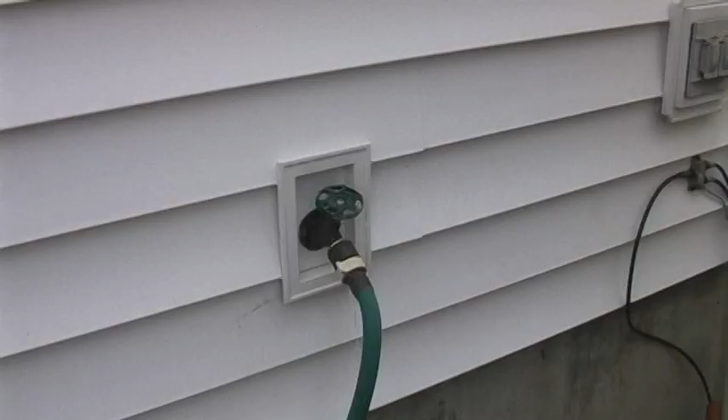The hose bib here at the side of the garage is leaking around the handle pretty excessively and isn't caulked at the siding junction, so it looks like it's spraying water into the wall cavity a little bit. Now look at it running out from behind there. So this hose bib, yeah, is actively leaking behind the siding a little bit.

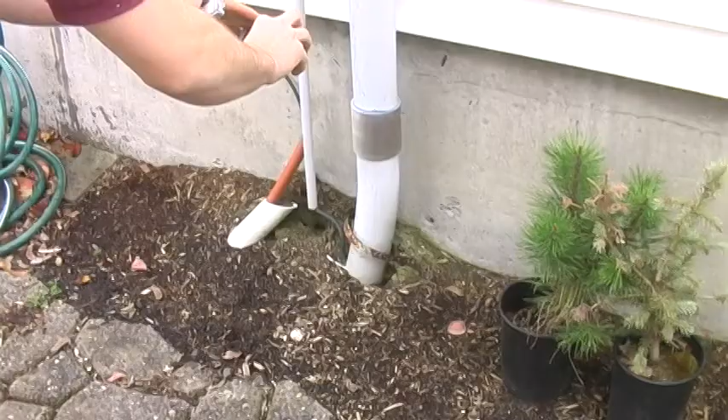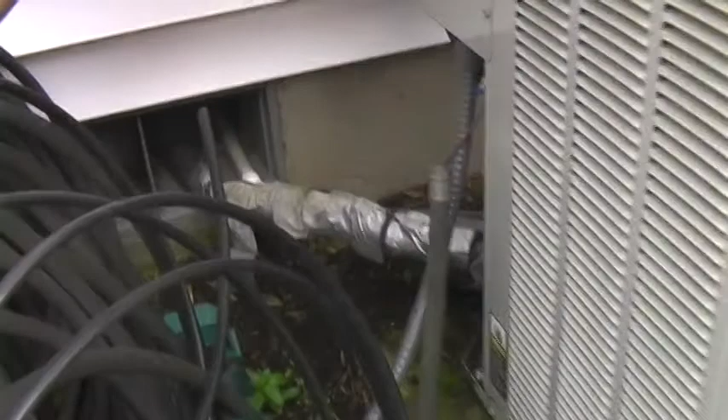If the ground settles around that conduit, it'll keep it from putting tension up here on these connections. So there's normally a clamp there and a clamp there that just physically connects that conduit to the side of the house.

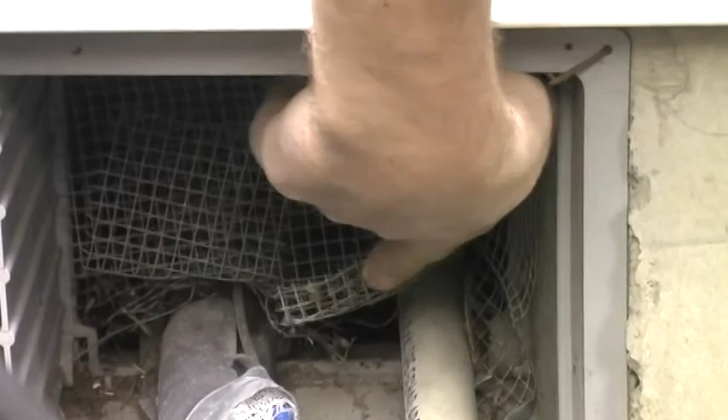Now, anytime we get bugs or rodents and things into the house, it's normally around these pipes and things. You see how those screens are kind of loosely fitting? A mouse could go under there pretty easily. It'd be good to seal around it with some construction adhesive, some more caulking, which would kind of positively glue the whole perimeter of that screen into the opening.

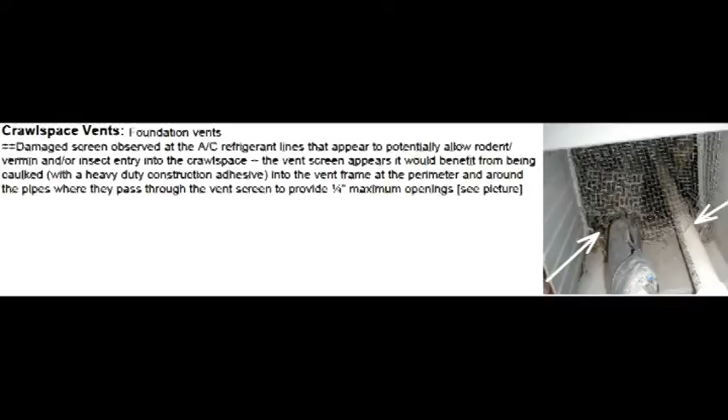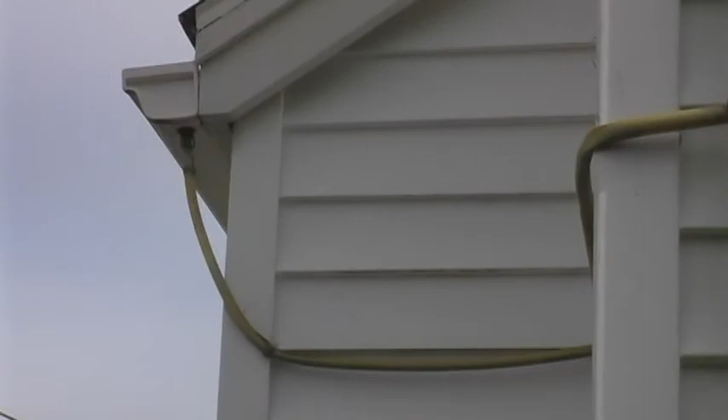But really, this is gonna just essentially overflow. It's gonna act as if there was... I think this is just as good as no downspout and gutter because of this. This is a real big restriction there.

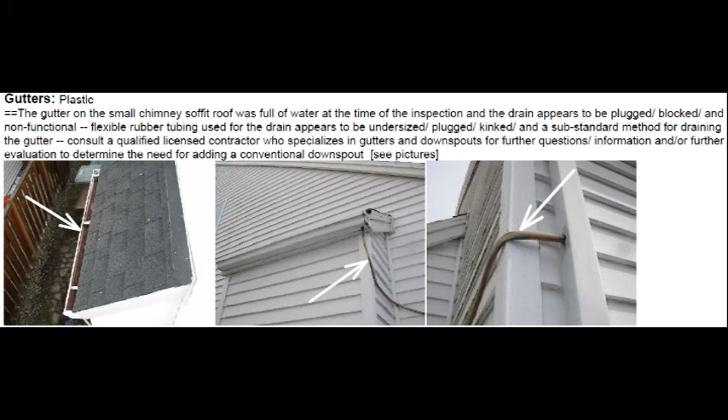One other thing too, these have these flappers that open and close onto the crawl screens, and really, you want to leave those open year round. A lot of people think you want to close them in the wintertime to keep from losing heat, but those are to allow air to travel in and out of the crawl space. So if there's any water that does accumulate down there, you want to allow it to evaporate and keep the humidity levels down.

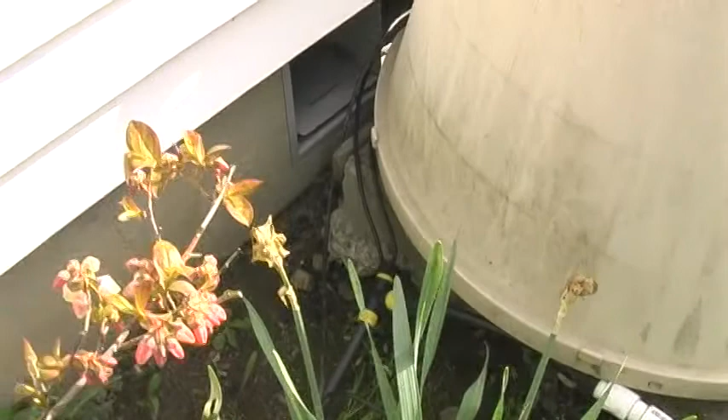See, anytime they hook the landscaping sprinkler system in to the actual, we call it hard piping it, when it's actually hooked in permanently to the water system, there's supposed to be a reverse anti-siphon device that will prevent reverse flowing of water.

Well, let's say this is turned on and one of these drippers is sitting in a puddle of water. Sometimes water pressures fluctuate, and let's say there's a fire down the street and the fire department comes and hooks their hose up to it. It can actually back siphon water, so it would basically be sucking dirty water into your drinking system.

And so they require it on landscape systems because of fertilizers and things. There's a few instances in the past where somebody's died because they contaminated their drinking water supply. So usually it's just a small part that you can add. It's an air gap.

Here at the rear of the house there is a hole next to the kitchen window. Looks like where it got shot with some kind of pellet gun or something.

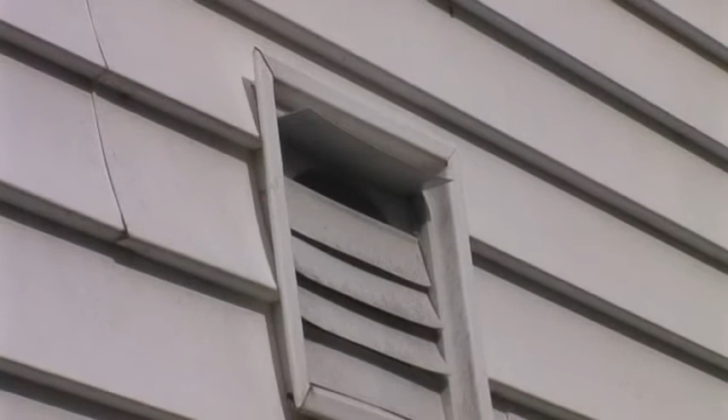See how that's getting stuck open? These are just flimsy little plastic baffles, and you can see how they're kind of curled. The UV rays cause those to do that, and then they don't close all the way. So you want them to close when it's not in use and open when you turn the vent on. What you don't want to happen is if they get stuck open, potentially wind-driven rain can get into the wall there, or you can get bugs in, or possibly, I've seen birds build nests in these.

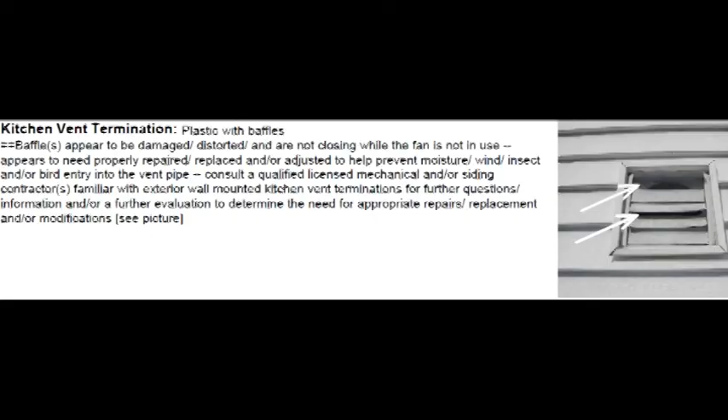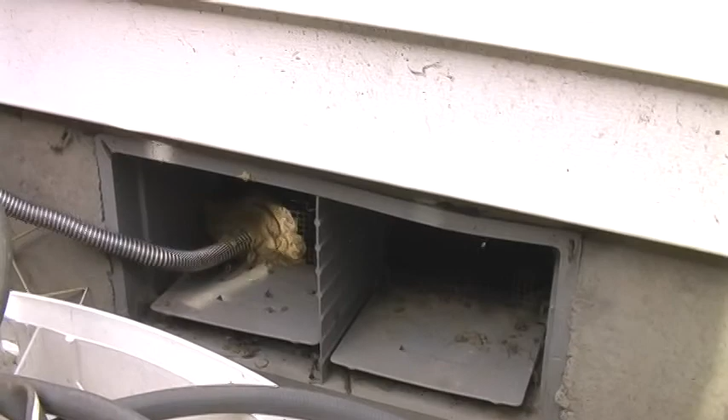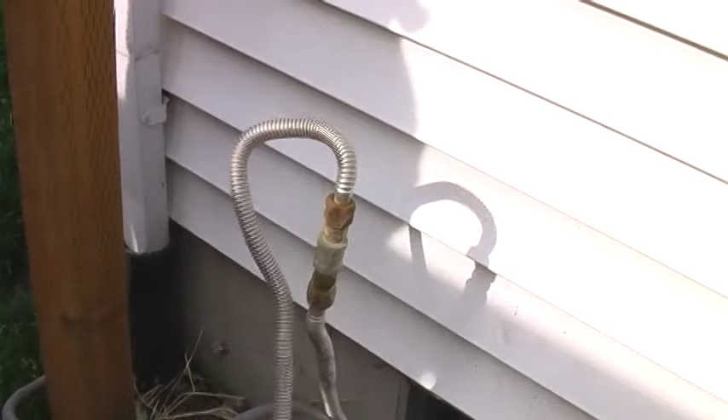Is that a gas line hookup? This is so you can have a gas barbecue. This is done really poorly too. You're not supposed to use multiple flex pipes like this. You're usually allowed to have one of those per fixture, one per the range. They've got two hooked together, and this isn't designed to pass through a finished surface.

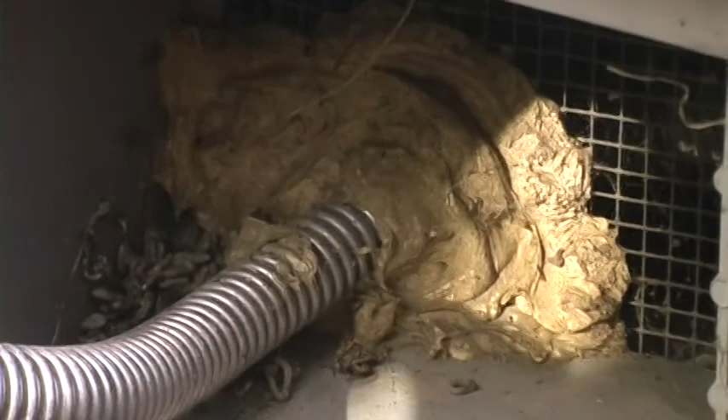It should have been hard piped out to this point, and then they could use a flex connector. So this will be on my repair list too, because it looks really amateurish. Anytime you're dealing with gas lines where you can have a gas leak, it's usually something I make a big deal out of.

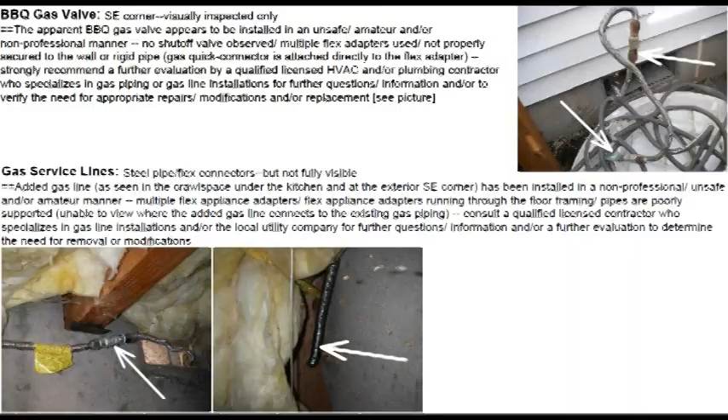Your dryer vent. So look at all that lint. I see that on almost every house more than 2 years old.

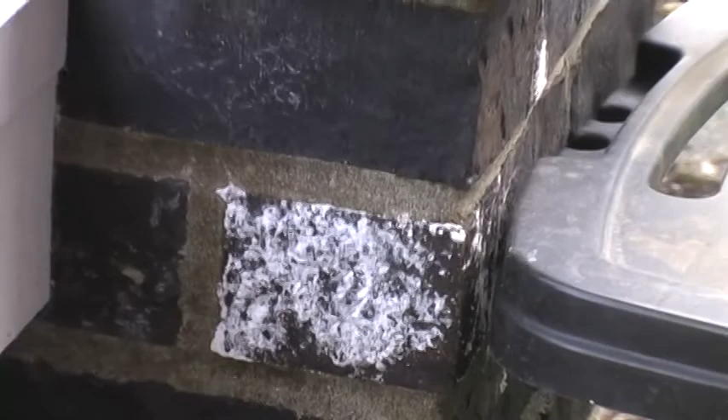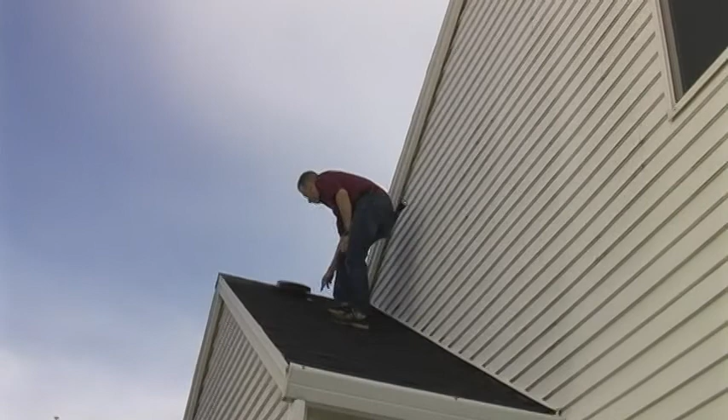See this white powdery stuff? It's calcium deposit. It's called efflorescence. So anytime you're having brick get saturated and then it evaporates out, it brings the minerals with it. So you can sometimes just put some water sealer on there, some masonry sealer. And on these caps, there's some nails that need to be caulked, so the water won't possibly seep in around those.

Boy, these are dirty. Ooh, I might stick my arm in there. Yeah, shower stalls are probably one of the most common plumbing leaks we find. The shower drain, because the drain is right in the middle of the pan, and that's where you're stepping. So you know you're dancing around taking a shower, stepping on that, it's moving up and down all the time. It's real common to get leaks.

So I'll confirm that when I go upstairs. It looks like to me at least it's been patched. That means they probably removed the ceiling and fixed it. But you need to keep an eye on that and make sure that if you ever see a water stain that you call a plumber in right away to fix that before it becomes an issue.

This is actually rusting out here. See, this is all corroded there. Yeah. This is what we would call a contractor grade disposer. So they don't normally last much longer than even 5 years sometimes.

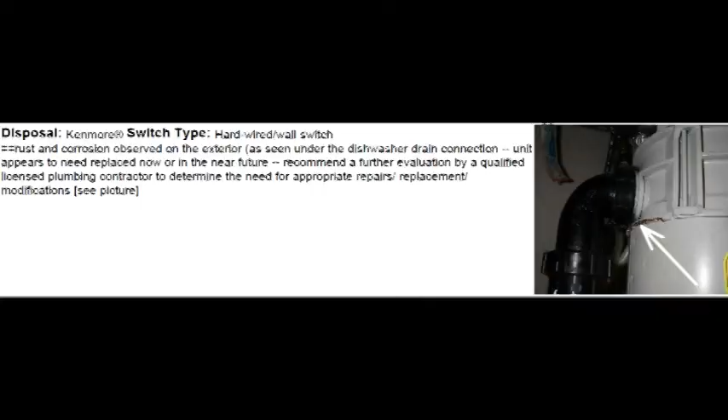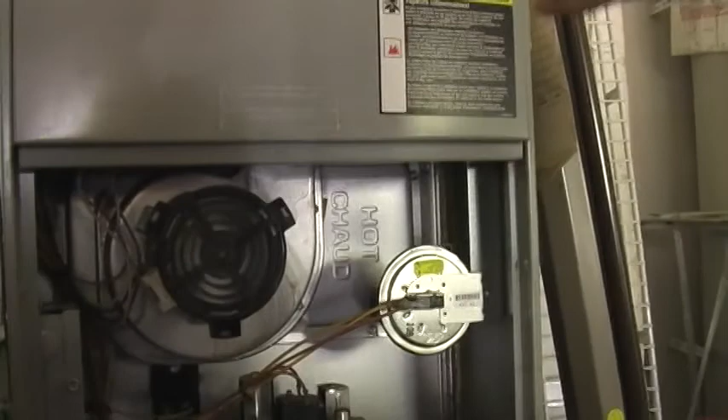So here's, you see all these water stains here? Been leaking right there. And the reason for that is the burned natural gas is really moist and has a lot of condensation. So that'll blow and then the condensation will leak back and drip there. Real normal to see that. However, that just usually indicates that this needs to be sealed.

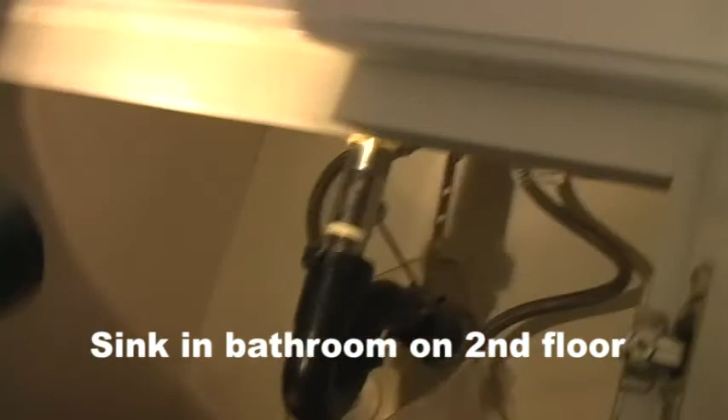This gap here. See, I don't know if you can tell, there's a little red caulking there. That's usually fire caulk and maybe just needs to be resealed. Oh look, it's dripping. You see that? It's gonna drip here in a second. Yeah, you know, I'll tell you what, can you see the water drop there on your video? Right there.

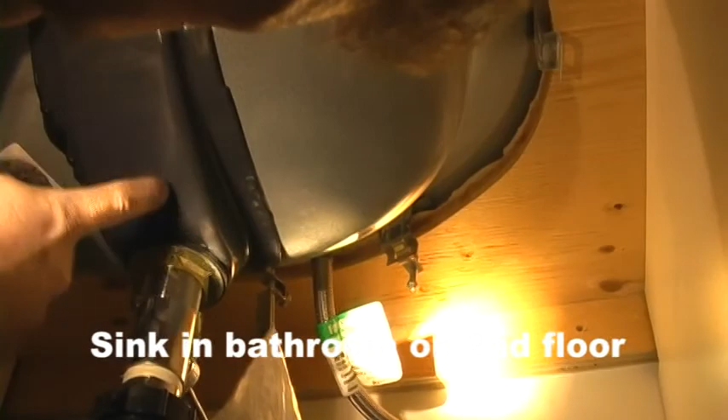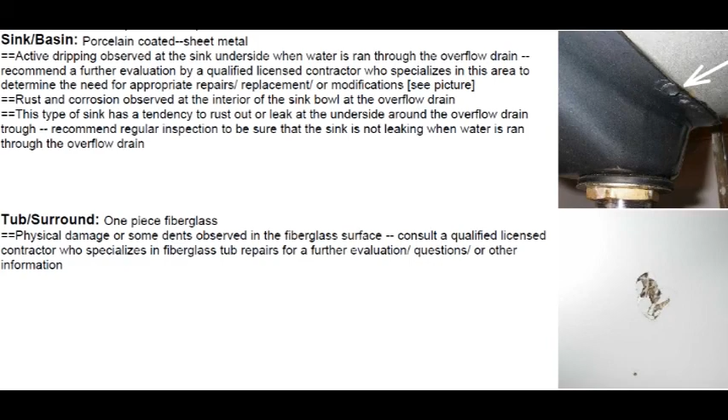This is one piece and this is a second piece, and they glue that, seal it, and a lot of times they don't get that glue. This has gotten soft from water. But you can make a note, there's a heat lamp and there's some past water damage or staining around the heat lamp on the ceiling.

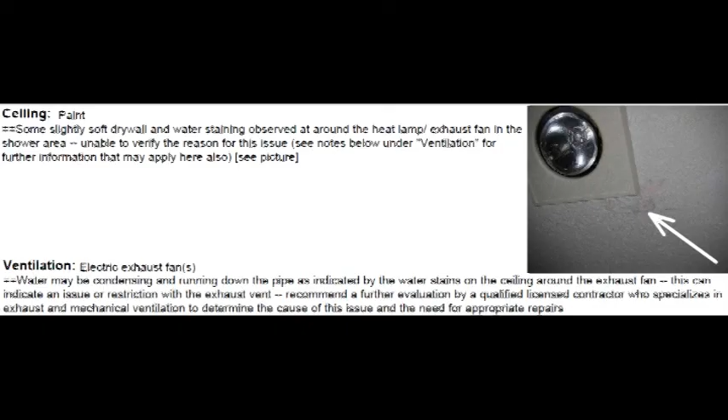There's a one-piece fiberglass shower, and just put the notes about the regular maintenance of the tub drain, and there's evidence of past repair work done as seen in the kitchen right below this.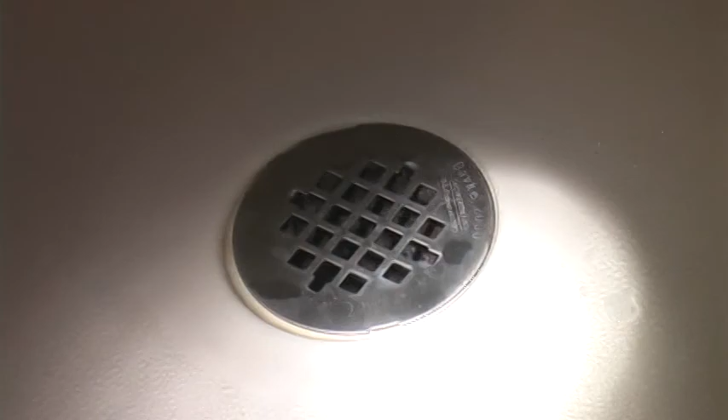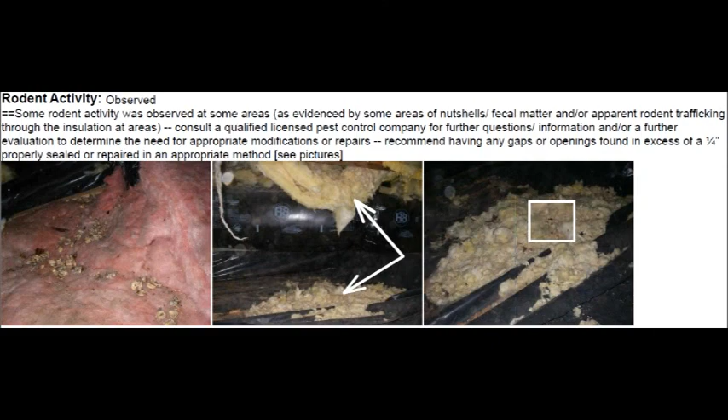Probably the bigger concern I have down there, which to me really isn't earth-shattering, but there's been a lot of rodents down there. Some maybe even bigger than rodents, like squirrels or something. I think probably because they've been coming in and out of that screen at the air conditioning we talked about. So they've got up inside some of the floor insulation and knocked it down. So it'd be good to have that resecured or replaced as necessary.

Probably the biggest concern, but they added a gas line for a barbecue over here on this corner, and whoever did that did a really non-professional, amateur type job. They used like 4 flex connectors. And not only are they connecting all these flex adapters together, it's not supported, so it's just laying on the ground, and they're actually running up and hooking it up somehow behind the range.

Actually, that flex pipe goes up through a hole in the floor, and I couldn't see the connection behind the range when we looked at it the first time. So that just needs to be evaluated and fixed for sure, because gas lines, you either should have it abandoned and capped off permanently or have it installed appropriately. That's probably one of my top concerns.